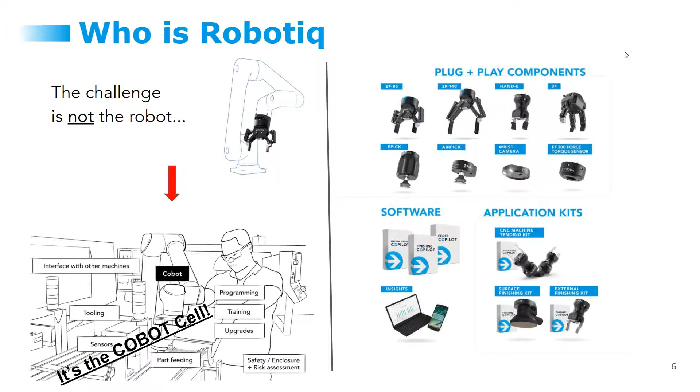A little more information about Robotiq: we're probably best known for our plug and play components for Universal Robots and other robot solutions. That comes in the form of what we call adaptive grippers, which is what you see on the bottom left of the screen — that's our 2-finger 85 gripper. We still do a lot of that business today, and in fact it's our bread and butter. But as time has gone on, we've realized we can solve more of the application by combining our plug and play components into kits specific to certain applications.

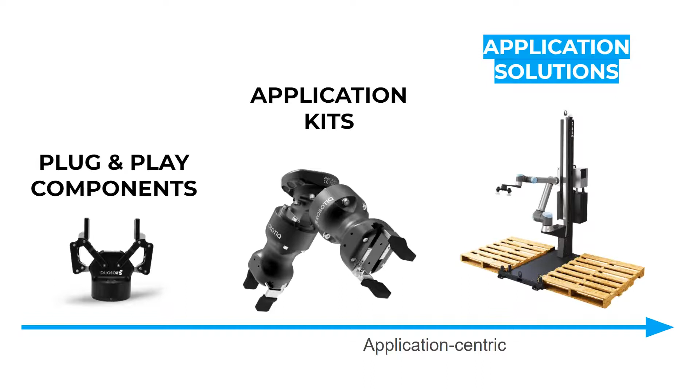Outside of CNC machine tending, we also have kits for surface finishing, sanding, and other such applications. The CNC machine tending kit, which is what we'll be diving into more today, falls into that application kit space, and that's what you see in the middle of the screen. Most recently, Robotiq has also gotten into the application solution space. The image on the right of the screen is our palletizing solution — if you have a palletizing application, I'd encourage you to get in touch with Ralph W. Earl and Robotiq to talk about that, but that's obviously not the content of today's webinar.

So the first question we want to address is: why a CNC machine tending kit?

With the introduction of collaborative robots, that has really changed, because cobots can work side by side with humans without the need for hard guarding or other safety equipment. We do always recommend that a safety risk assessment is performed when you implement a new cobot, but in a lot of cases, you can use the universal robot without the need for external guarding.

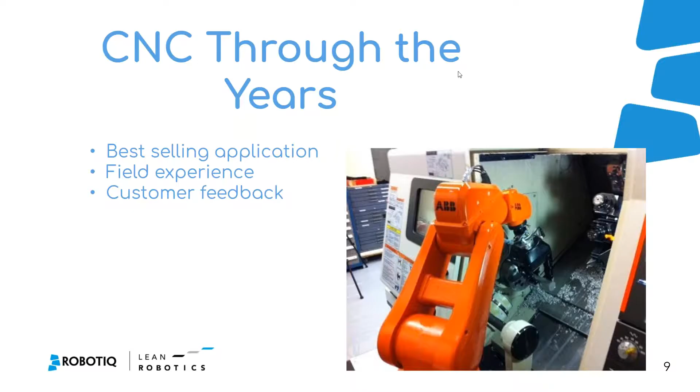The messaging behind it is that machinists are wanted, and it's not just local to New York, it's across the country and across the world. Skilled CNC machinists are hard to come by and they're quite expensive. We don't want these machinists tied up loading and unloading machines. We want them doing things they find fulfilling and engaging, like setting up new tooling and programming. We can leave those low-value tasks like machine tending to a robot.

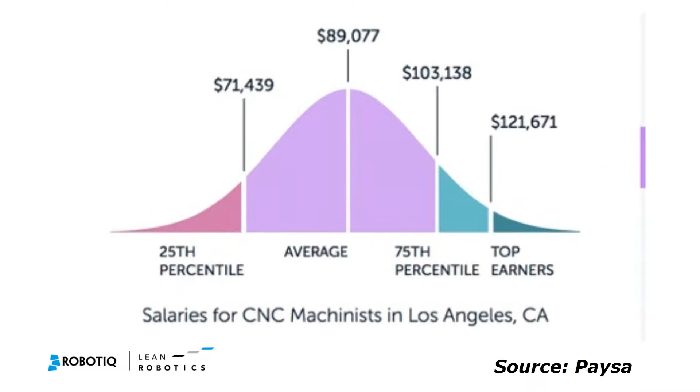A little more information to give you a frame of reference about the costs for a CNC machinist across the country. Outside of New York State, in Minneapolis, Minnesota, the average salary for a CNC machinist is $73,000. In Los Angeles, California, it's up close to $90,000, and in Fort Worth, Texas, it's $75,000. I'm not sure how that compares to your costs to hire a CNC machinist, but the messaging stays the same throughout: those CNC machinists are very valuable.

We want to make sure we're engaging them in the work they do, not leaving them to these boring, dirty, dull, and dangerous repetitive tasks that are better suited for a cobot. The other message we like to convey with our machine tending applications is that we want to keep the spindle running. When spindles are running, machines are generating revenue, and downtime is the enemy of every CNC shop.

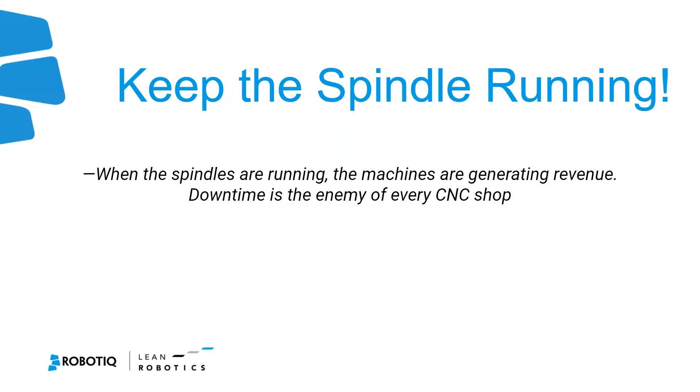So let's dig in a little more to Robotiq's CNC Machine Tending Kit, and we'll identify the ways we help you keep those spindles running and eliminate downtime.

First and foremost, as I mentioned with that industrial robot, machine tending tends to be problematic for a number of different reasons. There's a lack of reliability from the robot if you're moving it from place to place. Fast changeover is not necessarily possible, but it can be by using the right components in your solution. Does the robot and the grippers have a high capacity to handle a wide range of parts? That's a question you always need to ask.

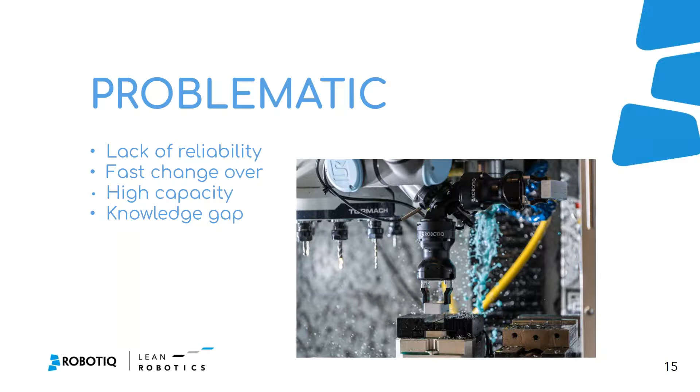The final thing to figure out is where's the knowledge gap. If we know how to program a CNC machine but we don't know how to program a robot, that leaves us a knowledge gap that Ralph W. Earl, Robotiq, and Universal Robots are able to help you fill with a number of free and easy-to-use resources.

So I'll start with a brief video here, and please don't worry that the audio is not going to come through. But I want to give you a video reference to see just how a robot does machine tending.

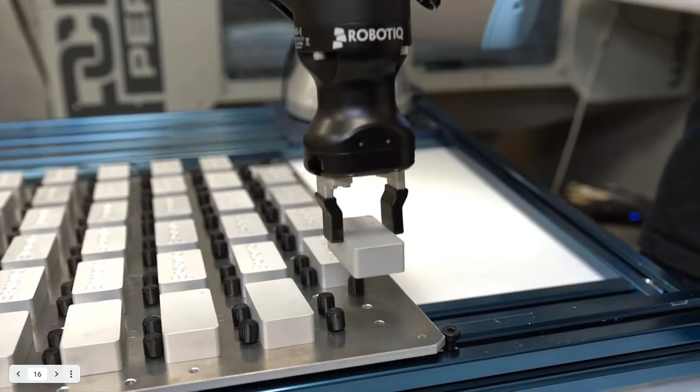So we see here that flexibility that you're able to move the robot from one machine to another, depending on what different jobs you're running on your shop floor.

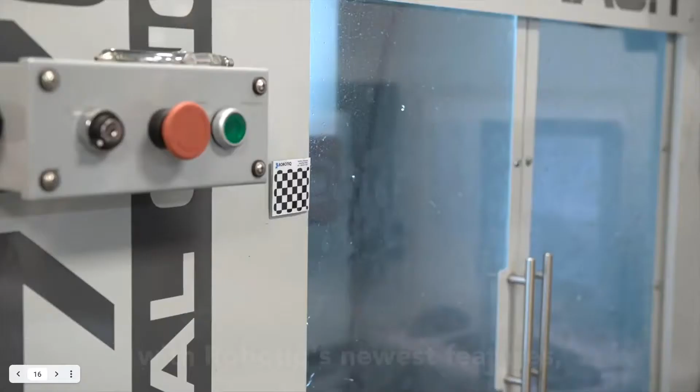We have flexible software and tools, like our visual offset tag that you see here on the screen right now, that enable the robot to move from place to place and take one picture or do one touch-off to register the robot to the machine it's working on or whatever other work surface.

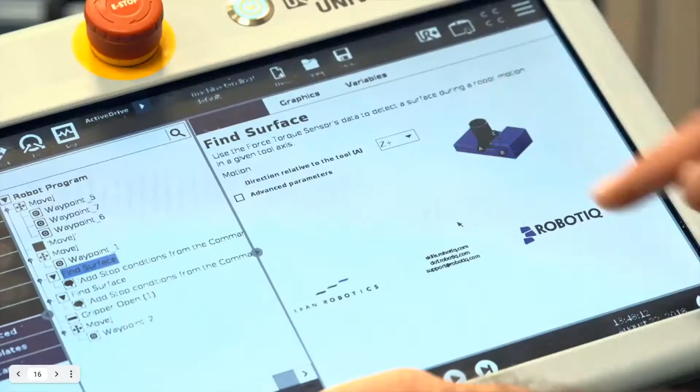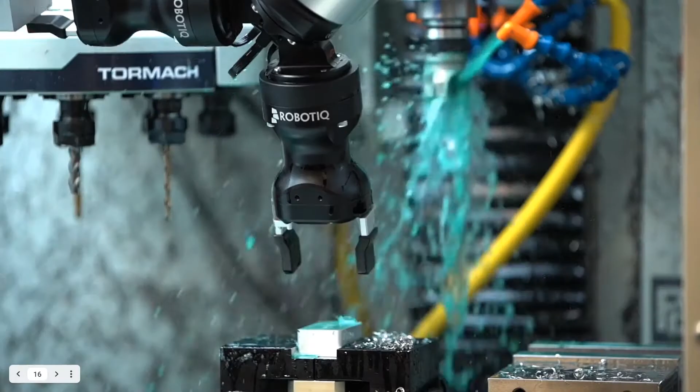All of our software lives on the robot's teach pendant, and it's integrated through what is called a UR cap, which is kind of like an app on a phone. So controlling the grippers, controlling the wrist camera, and the Force Copilot software is all intuitive and easy to use on the robot's teach pendant.

And then finally, the products are meant for that harsh industrial environment, so we'll dig into that here a little bit as well.

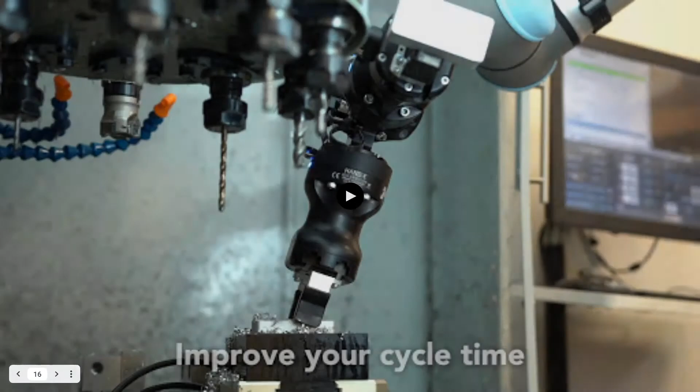Just jumping into the CNC machine tending kit itself to give you a frame of reference for what's included. On the software side of things, inside of the wrist of an E-Series universal robot, there's a built-in force torque sensor. That sensor itself is actually Robotiq's technology, which is now integrated on every single E-Series robot.

What we have is our Machine Tending Copilot software, which adds a lot of different features and functionalities and takes programming from being 100 lines of code down to a simple interface, where you just say, hey, I want this to do a spiral insertion to load a part into a chuck, or I want to make sure my part is fully nested in the vise within the CNC machine.

You'll be able to see that in a lot more detail during Marc Antoine's demo, so I'll kind of breeze through it for now. Next, right after the robot's tool flange, you have the option to either use Robotiq's wrist camera or not. It depends on your particular application. But we do find that about half of our CNC machine tending kits are deployed with a wrist camera because it does add a tremendous amount of flexibility and versatility to your robot.

Our wrist camera is seamlessly integrated as the coupling between the tool flange and the grippers, and it has its own LED lights, etc., which enables you to take a picture and find parts on a work surface, and then automatically our software guides the robot to go ahead and pick those parts and then take the next step of the operation, which is probably loading that part into the machine. On top of that, with the camera, we can ignore parts that we're not looking for if those happen to be in the vicinity. We can do barcode scanning and run a certain program based on the barcode we scan.

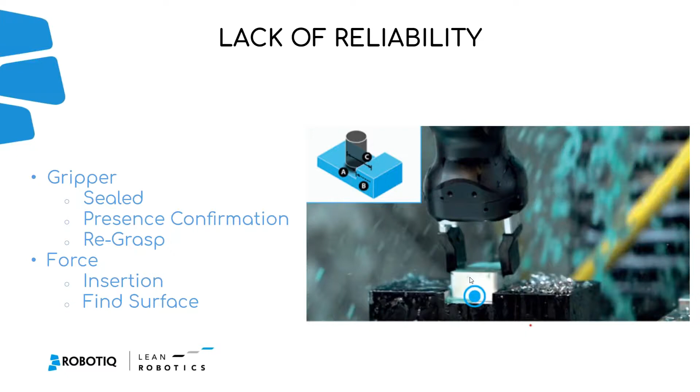In terms of the need for fast changeover, again, something that is not offered by a non-cobot solution or an industrial robot. We also, through our camera and through our contact features, there's no more need to have complex and expensive fixtures to have your parts in place. Typically, with automation, one of the most important things you have to worry about is having those parts in a consistent pick position. And honestly, in my experience over the last few years, that is something that had always been a cause for concern: okay, great, the robot is going to be perfect for loading and unloading the machine, but how do I stage my parts?

By using our contact offset features, you don't have to worry about how a tray of parts is positioned. The robot can adjust itself accordingly. With our wrist camera, you can both find parts to be able to go pick and load into the machine, or you can use our visual offset. If you are using a nested tray of parts, all you have to do is put that tray within view of the camera, and then it's going to adjust itself accordingly to pick those parts off that tray.

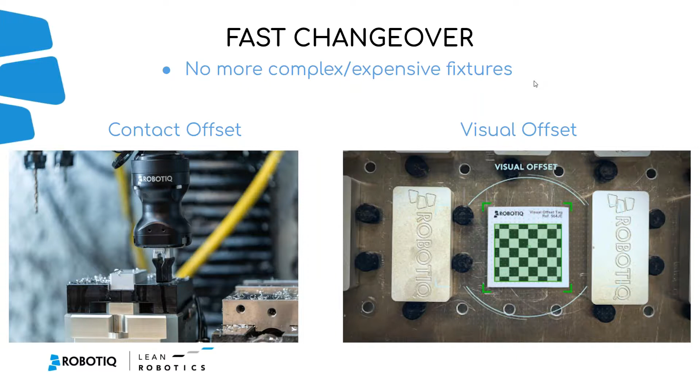Another thing that plagues... Hey, Tyler. Yes. Oh, hey, yeah, just wanted to throw in, we had a few questions here. Just wanted to ask you. All right. One came in about the largest part that the robot gripper can handle. And it looks like you're gonna hit that right now, so that'll be a good transition. And then just a question to keep in mind was asked regarding how do you present the parts to the robot, and how repeatable does that need to be? So just a couple things there.

Perfect. So in terms of part presentation, that was something we kind of addressed on the last slide. But basically, you have the option to do it in any way you want, whether you want to just spread parts out on a tabletop surface and let the camera find them. If you want to use trays and drawers of parts, there are drawer feeder systems available. And I know, Jason, that's something that you guys have used in some of your deployments. Yeah, to load up hours and hours worth of parts, and the robot is integrated to work with that.

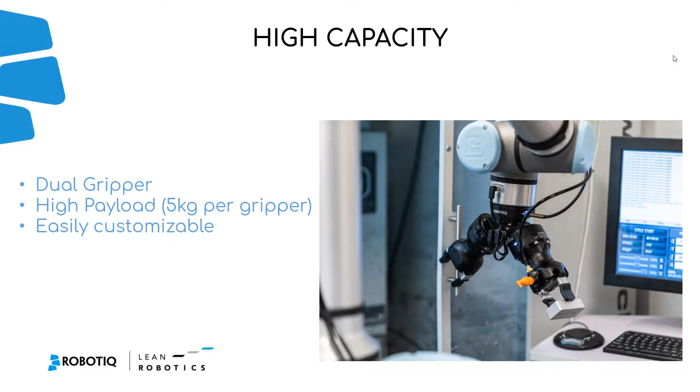All right, thank you, Mark.

All right, so the final thing that troubles us is bridging that knowledge gap. Again, we know how to operate a CNC machine, but we don't necessarily know how to operate a robot or how to communicate with the robot. And that's where you want to rely on Ralph W. Earl and, again, Robotiq and Universal Robots resources to help you out.

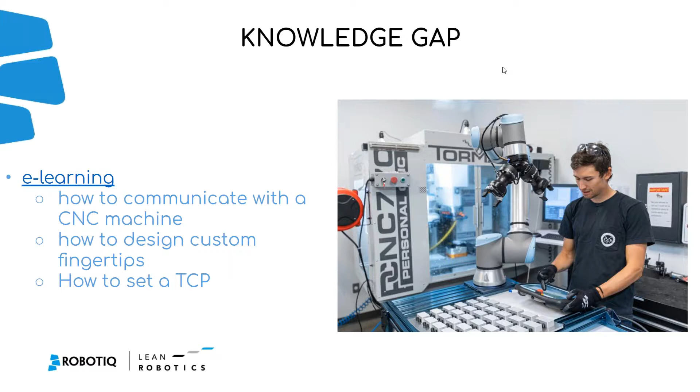So for Robotiq, we have an entire e-learning platform, which I'll actually jump into here in a second. But our e-learning platform has lesson plans dedicated to each of our products and then applications as well. So we can show you how to communicate with a CNC machine, how to design custom fingertips, how to set a tool center point when you're setting up the robot with its end of arm tooling, and more.

So if I jump into this link here, this is just elearning.robotiq.com, and I would encourage everyone to go ahead and check this out for yourselves to learn more. Each lesson is broken down into about 5-minute segments, and it's easy to digest and work at your own pace. So if I go into the Cobot applications category, and go to the CNC Machine Tending Kit,

we can see that the course itself is broken down into a few different phases. These are actually, I mentioned before, those lean robotics phases. We break a project down into 4 phases: prepare, design, integrate, and operate. And so our e-learning is set up kind of the same way.

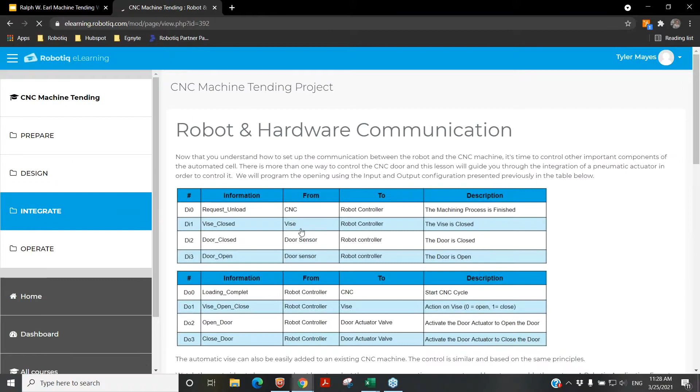So if we want to look at the integration phase, for example, and we go to the course, we can view how the robot and the hardware communicate. We tell you how to use the different I/O signals in the robot controller. We have videos to guide you, program templates, drawings, etc. All that and more is available for free on our e-learning platform.

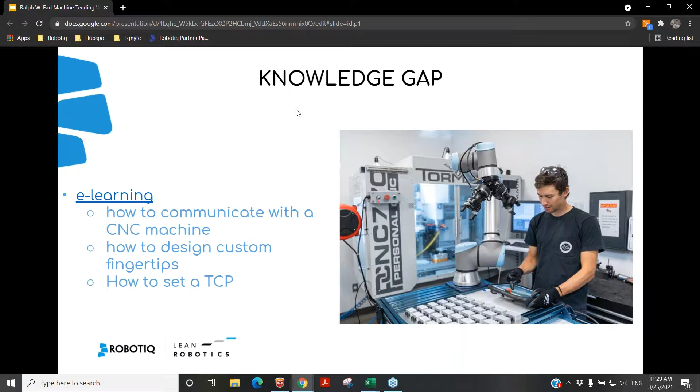And if you start here at the prepare phase, if you've never deployed a robot before and you're just trying to figure out how, this prepare phase will take you all the way to being a robot expert. Good, because those are some of the questions we're seeing. Primarily how to connect those two together. How do you set up that process? And a lot of those e-learning modules will help walk you through that. Even communication in a physical interface with the CNC machine.

Exactly. And depending on your machine, they may have an interface available to be kind of plug and play with a Universal Robot. Again, it all depends on the machine itself. But the very simplest way to do it is to tie the robot's I/O in with the CNC machine's I/O, and we can use that simple discrete I/O communication so that the robot has its task to load and unload the machine, and then with an I/O signal, we can just trigger the CNC machine to start.

Or you could even use the robot. I've seen deployments where the gripper itself actually goes and touches the button to start the machine. All of that flexibility is at your fingertips, and you're able to customize your deployment depending on what your needs are.

So again, just to recap before we jump into the remote demo on the CNC Machine Tending Kit, it comes with the dual Hand-E grippers. So that's going to offer you flexibility to be able to pick a wide variety of parts. And then having 2 grippers is very important for cycle time, where we can have a raw part in one gripper, and you have the ability to pick up a finished part with the other gripper to help improve that cycle time and keep that spindle running, again, generating revenue.

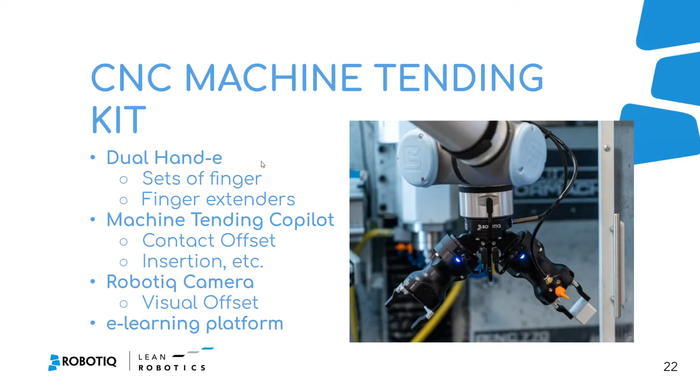All right. So I will open it up for questions again before we jump over to the live demo. I see a question here: can the Robotiq grippers be exposed to machine tool coolant? And the answer is yes. Great question. The Hand-E grippers are designed and built for that environment with their IP67 rating, which is not found on every robot gripper, so it's something to always keep in mind. Our Hand-E grippers are designed to work in the machine coolant environment. The wrist camera and the robot itself are meant to handle that as well.

Jason, are there any other questions that I'm missing? Yeah, I think I've asked the rest during the presentation thus far. I know there's some others trickling in, but if it's appropriate, I'll ask them during, and then we'll cover all of them at the end. At this point, I think you've touched on all of them. All right, perfect. Well, without further ado, I'm going to kick things over to my colleague, Marc-Antoine, so he can perform a remote demo.

That sounds good. Let me share my screen. Let me know, Tyler, if it's all good, you can see my screen. Yep, I can see your screen. Cool. And we've got both views of the robot. Everything looks good. Sounds good.

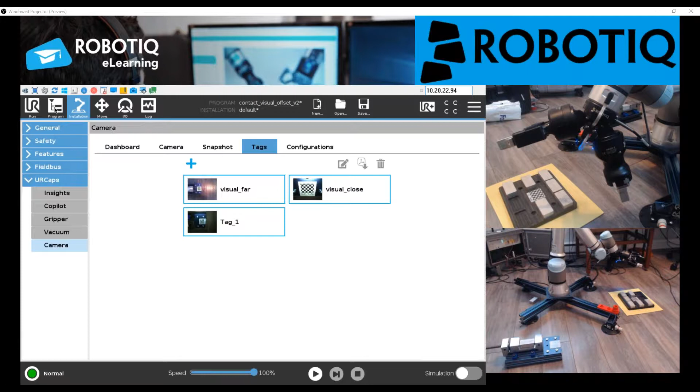So, one way to use that tag on the machine tending. As I was saying, for the tray it's pretty simple. We place a tray around the table and we go for it. For a CNC machine, I would say:

if we place a tag on the machine, you could have, for example, one robot that is tending the parts to 2 or 3 machines, and then you would have an operator move the robot from machine to machine. So instead of bolting down the robot and having a perfectly fixed position, you can just put it there as precisely as humanly possible. And then with the camera, you take a picture, and all the waypoints will be registered. So these two are really setup steps that will make the setup quicker.

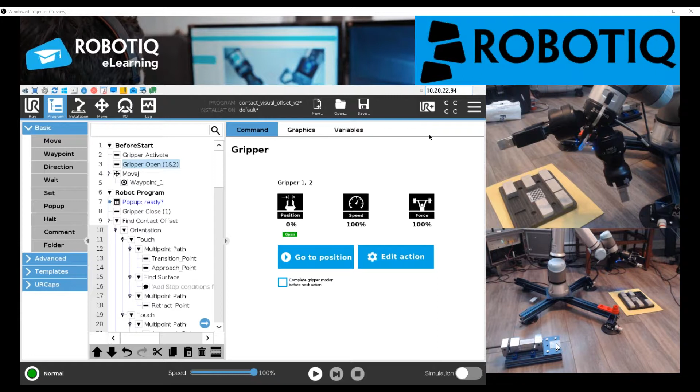The other thing I wanted to mention before showing you the demo: we've got the machine tending kit. We've got a Machine Tending Copilot with the sensor embedded in the E-series. We've got the camera in here. I've got the hand-E gripper on one side. On the other side, I don't have a second hand-E gripper because with the COVID situation, we just ran out of the office with the parts we had in hand. So that's why I've got the 2F-85 gripper as the second gripper.

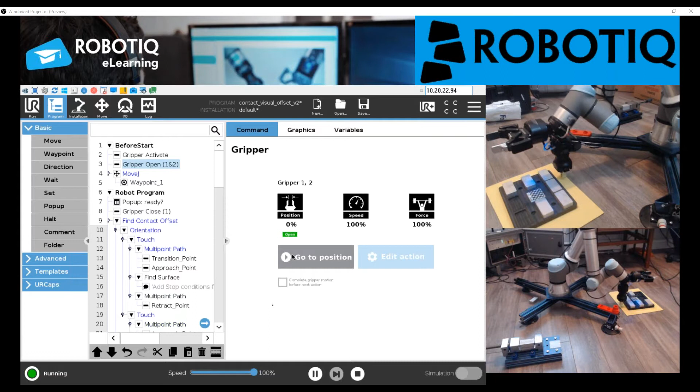So without further ado, we can press play on the program and you're going to see the robot moving. And afterward, I'm going to show you how it is in the program per se. So right now, we are going to touch the edges of the tray to locate that tray. We're going to do 2 touches on one edge to get the orientation.

I'm going pretty slow and I have a mat just because it was really slippery on my floor, so it's just helping me right now. So the third touch is on the other side. So with these 3 touches, we know exactly where the part is.

We go with the raw part to the vise. We take a first picture pretty far out just to have a bigger field of view. Then we take a second picture closer to have better precision. And then we're going to know exactly where it is. Okay, so the second picture didn't work, but I've got a redundancy, so we're going to take another picture.

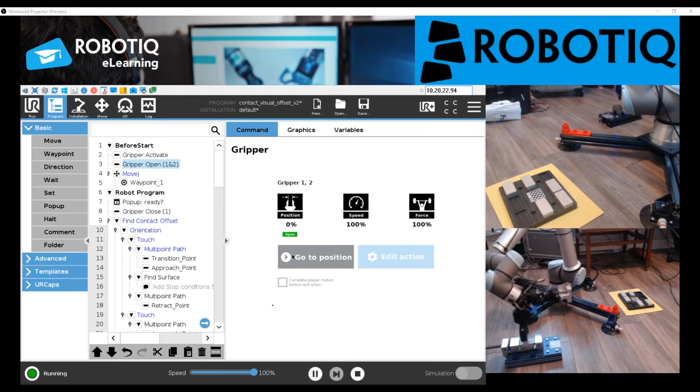So we take the finished part with one gripper, place the first raw part in there, and we go place the finished part somewhere else. So that's pretty much the goal.

Right now the program stopped, but basically once you've done one contact offset and one visual offset, you would be able to run the program and the robot will still remember where those locations are. So if we go quickly through the program, we've got the before start, activating the gripper open.

We've got the find contact offset, so that's a node that we have. Let's say I put a new one in there just to show you how it works.

We're going to teach a sequence, and as you can see, everything is done via the teach pendant. So we choose a feature point, we can do translation or orientation. In this program I've done both. Let's say we start with a translation, and as you can see, everything is in yellow, so this has been populated automatically.

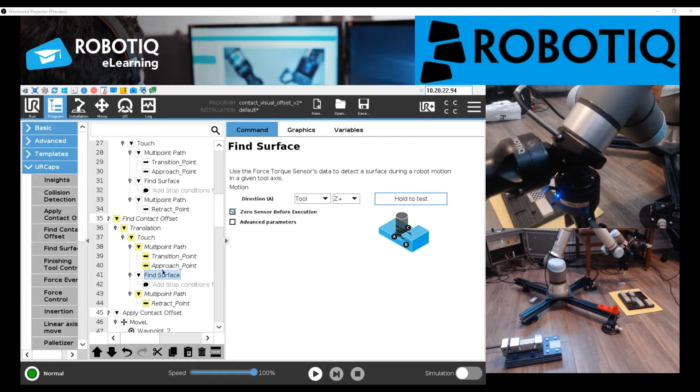So everything you need to do from now: you have the transition point and approach point that you have to teach. Then we're going to have the find surface, a feature with the force torque sensor, the machine tending copilot. You choose the orientation, there's some advanced parameters you can modify, so it's pretty easy. You select the orientation, select the speed, select the force threshold, and then when you touch the edges, you can jump to the next node, which in this case is a retract point.

So if I delete that and go back into the real program, we've got the find contact offset. We've got the first one, which has a warning saying if you modify this you can break something, but basically we've got the orientation with 2 touches, as you can see here with the 2 folder, so everything is there. Then we've got a second one, which is the translation. Overall we've got 3 touches, and it's pretty simple to program. We've got a few points, find surface, and that's pretty much it.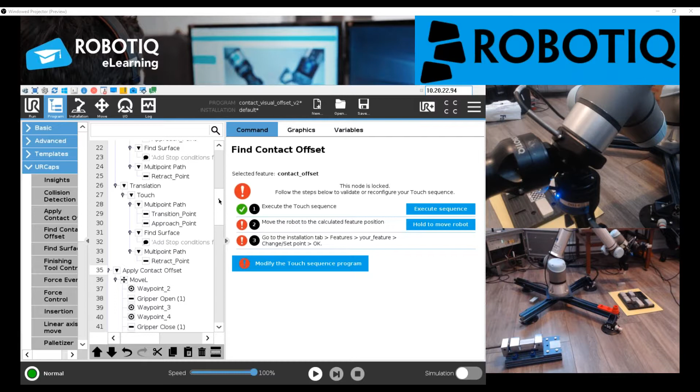From there, we're going to have the node apply contact offset, which basically tells the robot, okay, from now on everything below that node, you can use the new position to make all the movements. So these were my waypoints and gripper open to go pick the first part into the tray.

From there I've got a grip check, just a function within our gripper to validate that a part has been gripped. We can check if the object is detected, or also validate the grip dimension with the gripper. For this example I didn't need it, but it's a good first quality check if you want to measure the part.

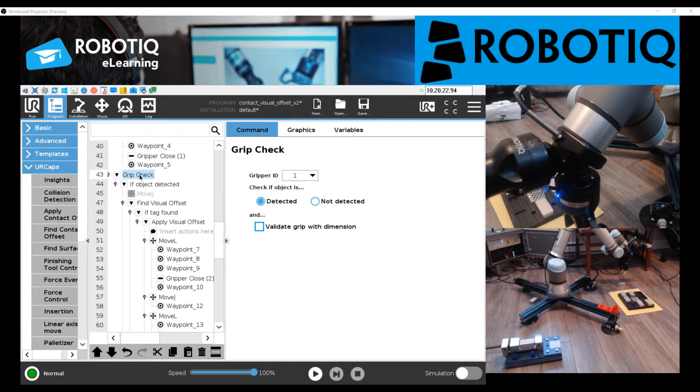From there, once the grip check is good, I'm going into the vice basically, and I'm going to do a find visual offset, and that's where I'm going to select the tag. You could have as many tags as you want, but that's where you need to select the right tag. So we take 2 pictures within this node exactly, and then we apply the visual offset. So we tell the robot, okay, from there everything below that node, you're going to use the new position of the vice, of the tag basically. And then we have the waypoints.

This would be a good time to ask this question we got in the chat: are the tags bolted down or adhesive backed? Just curious how they hold up to coolant in a machine for longevity and quality-wise for taking an image.

It's kind of a metal tag, so it's pretty robust. For machine tending, we'd recommend having it outside the machine, to make sure you don't have any debris or coolant on it, so it's always clear from anything, so the camera can always locate it. But it's pretty robust, it's a printed metal, and you can stick it onto the machine. It does have an adhesive back to it.

Now you could put that tag inside of the machine on a vise. Actually, in the video we showed earlier in the presentation, they had a kind of an air knife or blow-off nozzle built into the CNC machine tending kit to do a blow-off. So you can use it inside of the machine, but we'd encourage you to add that blow-off just to make sure the tag is free and clear of debris.

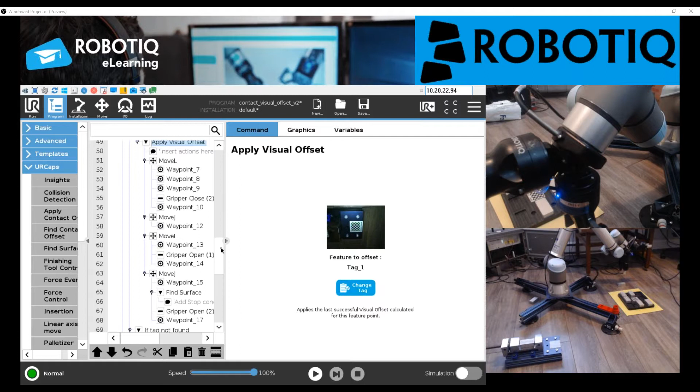Speaking of IO signals, we don't have them in this remote demo program because we're not tied into a real CNC machine. But within this program, to activate an auto door, you would just add an IO node to set that high or low, as Mark's doing on the screen.

And it would be the same for a vise, if you have an air vise that can be controlled via IO. So it's pretty simple: you connect the vise or door actuator to specific IOs on the robot, then select the one that's connected and manage whether you want it low or high. That's pretty simple to do with the UR.

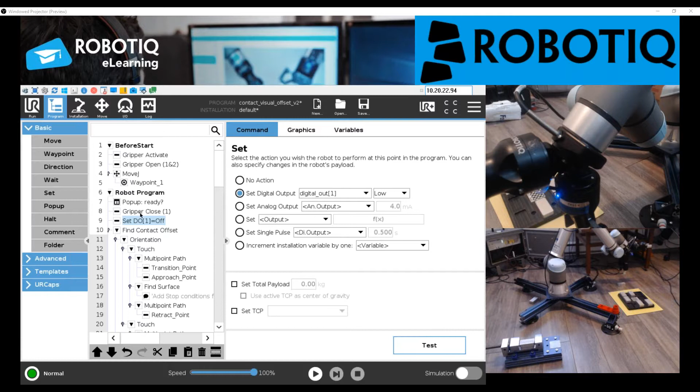And my recommendation would be to ask for these products from your machine tool vendor, or from Ralph W. Earl as well. All right, thanks Mark. Thanks to you.

So that's pretty much it for the machine tending demo, but I wanted to open a different program and show you an assembly application, I would say, but it can be useful for machine tending as well. Let me open this one. There's also a different part presentation, so that's one of the reasons I wanted to touch on this one.

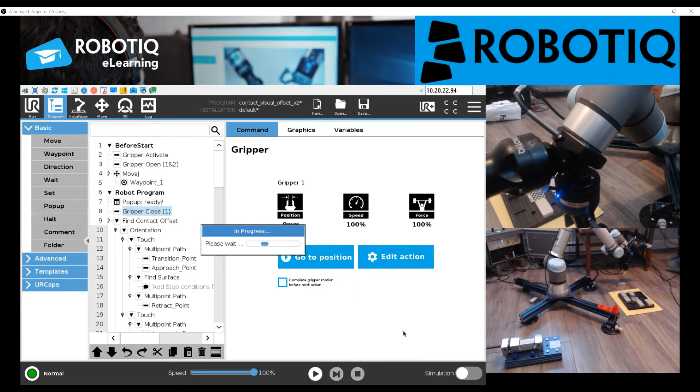So we've got a small 3D printed cylinder here. We're going to simulate that parts are placed on the table in a random way, and we're going to use a 2D camera located here. Everything is taught via the teach pendant of the UR, so it's really easy. You can take some pictures and the part will be taught, so you don't have to be an expert in programming or anything.

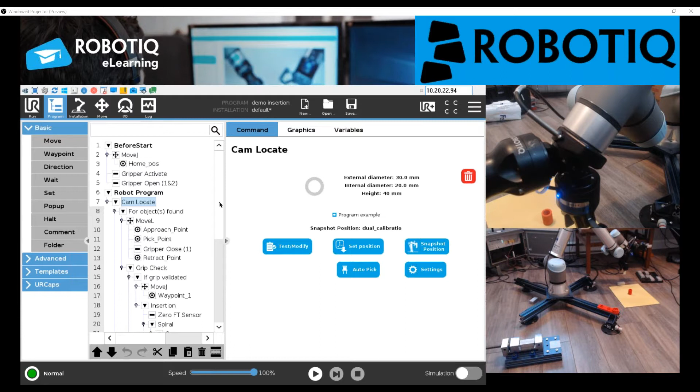From there, we again use grip check to validate the grip is good. With this one, we measure the part to make sure we have the right one in hand. Then we use the force insertion nodes, which can also be used if you want to place something into a vise or make sure the part is well placed. We've got spiral search, rotation search, and linear search, all monitored with force.

Again, pretty simple, really similar to the find surface. We can teach a position, we have the orientation as well, and a few parameters to monitor speed, force, force initiating the spiral move, force initiating the insertion, and stuff like this. Rotation is the same thing, really similar, with a few parameters.

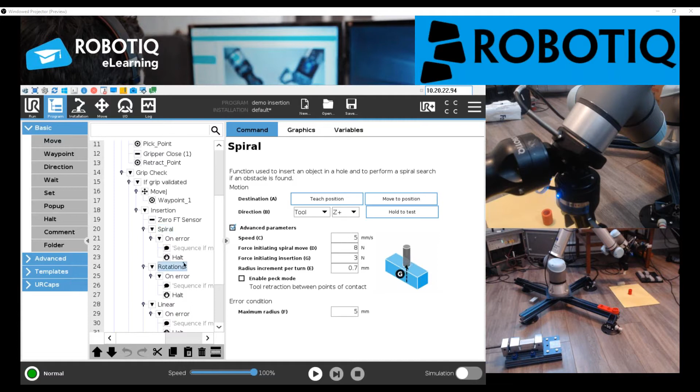And then at the end, a linear search, pretty much the same as the find surface. We push into one direction, and then we have a force threshold. So I'm just going to play the program.

You're going to see the camera in action, go pick the part, and then do the insertion. The camera takes a picture, we go down for the part, and then do the insertion in this jig that I've also 3D printed.

So it was just a quick demo to show you that there's a lot we can do with the camera. There's a lot of part presentation we can do as well, and you can also use the force in different ways.

These features are very useful to make sure the robot stays running and doesn't run into a fault scenario. If you don't build this kind of flexibility into your program, and let's say your part was misaligned, this spiral insertion is a good solution, for example for a CNC lathe loading cylindrical parts into a chuck.

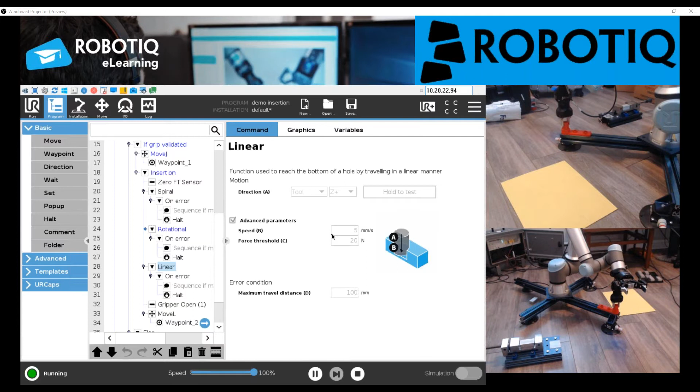If that part is misaligned with the chuck and the robot bumps into it without using our force software, it's just going to stop the robot and need an operator to come and intervene to fix the situation. And obviously, that's not the goal of automation. That's not what we want.

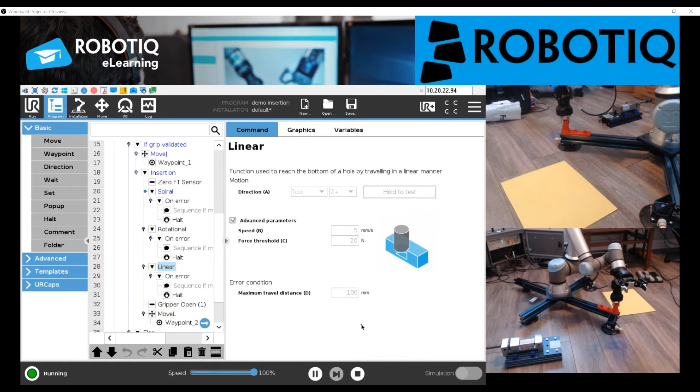So with our software, it's a little tough to see just because of how small the movements are, but it's important to know what's happening: as this robot is trying to put the part into the chuck, the simulated chuck here is spinning around and feeling for when that part engages and is able to go past the upper surface and then get fully nested into the chuck.

So I don't know if there's any question, but that's pretty much what I had in mind for the demo today.

All right. Does anybody have any other requests to see while we have the robot and remote demo screen up? Yeah, I'm not seeing anything additional, Tyler and Mark.

All right, Jason, any input for us before we jump back to the presentation? Yeah, I was just saying how effective the software is for getting that simple solution figured out.

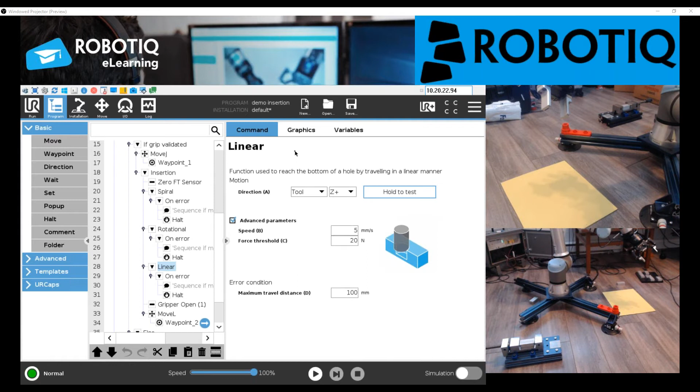You guys have put together one heck of a software package to help solve these specific applications in CNC machine tending. So all these things that Mark and Tyler are reviewing and showing you, these are things that we can do and bring on site and show you how this can be applied simply to your pieces of automation.

So, if there is interest, we'd love to do that type of thing and demo it right on your floor. So just a little feedback, but you guys make it very easy to do.

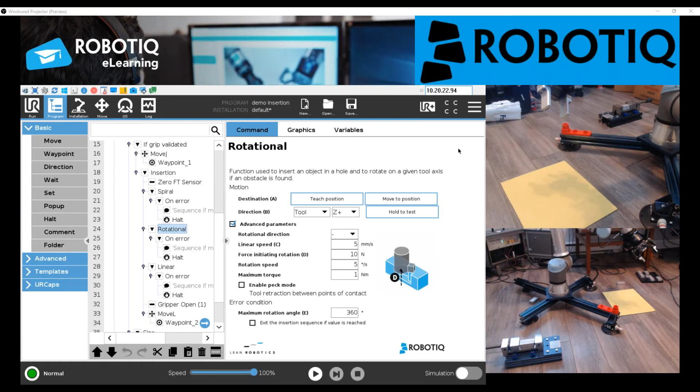All right, so I want to open it up right now, and I'll leave contact information both for myself and the Ralph W. Earl team, so you can get in touch with us after this webinar and take the next steps. I would highly encourage you to reach out and contact us, and really let's talk about your project, talk about the parts you're trying to run, the part sizes and everything.

And what we can do is match you up with the right kit. It's probably going to be the Robotiq CNC Machine Tending kit, but also help you out with training if needed. Ralph W. Earl is a certified Universal Robots instruction facility, so you can join them for UR training. You can join Robotiq for a remote demo at any time, or use our e-learning platform at any time.

And really, I would encourage you, if you're thinking about taking this jump into cobots and automated machine tending and you haven't had a chance to do it yet, you're not necessarily behind, but you would be joining thousands of other customers who have automated their CNC machine tending with a cobot. Really, it's something that's revolutionizing the CNC world, because we're able to add more consistency to our cycle time, drive down the cost to produce each part. And if we use something like drawer-based systems, we can have so many parts staged and ready to go that we can run our robot lights out and have ourselves generating revenue while nobody's even in the shop. So all of these things and more are possible by automating your machine tending with a cobot.